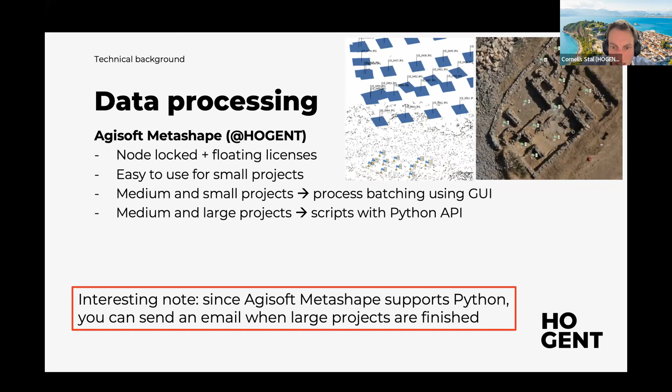So just a little side note that was very interesting.

In terms of data publication, old school data publication is really about preparing your orthophotos and digital elevation models as cartographic deliverables, with the conventional grid system, a scale bar, and stuff like that. It's old school, but still very handy and easy to share your data and deliverables.

Another way is to share the data as georeferenced images, as a TIFF, for example. When talking about 3D models, most often you'll see file formats like a PLY file, FBX file, or OBJ file, accompanied with one or multiple texture maps. You put it on your USB stick, put it on WeTransfer, and share your data as is.

The problem with these approaches, however, is that you will always need some kind of external viewer to interact with this data, which is not very convenient. Not everybody has ArcGIS or QGIS. Not everybody has a 3D viewer like MeshLab.

That's why we've decided to focus heavily on, for conventional 2D data, tiled 2D models. I'll explain that in the next slide about spatial lite databases, but also tiled 3D models that are compatible with online point cloud viewers on one hand, and online 3D viewers, so textured 3D model viewers that can be used in a browser. There's also an option to use online services like Sketchfab, or put all this data on your own hosting space.

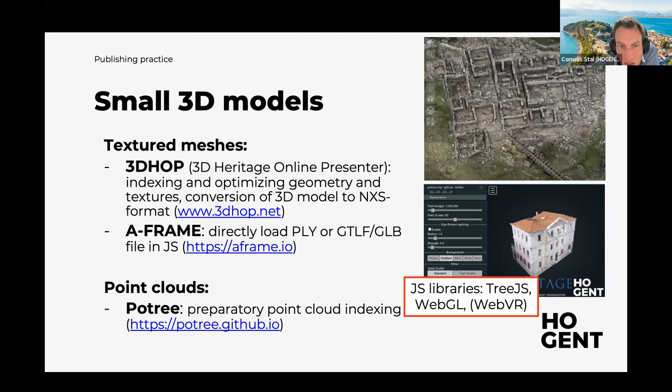So as a function of zooming in and zooming out, a certain amount of data will be loaded into your web browser. Here on the lower right-hand side, you see a small example of the town hall of Nafplio in the Peloponnese in Greece, where millions and millions of points are visualized, but only a portion of this is shown as a function of the distance to the object.

When it comes to large models, and large meaning gigabytes and gigabytes of data, there are other interesting options like Cesium. It's actually a virtual globe software like Google Earth, but totally open source. In this case, I'm also using the open source JavaScript library for data visualization. From Agisoft, we are using that software, which has the option to export your tiled 3D model in a format compatible with this JavaScript library, allowing very smooth interaction with these databases.

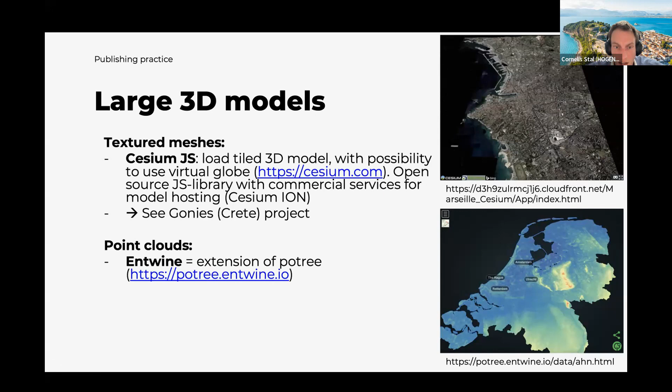With a few slides, I will give you an example of that, because these are examples that I found online. Here, the city of Marseille implemented in Cesium. And on the lower right-hand side, you see the Algemeen Hoogtemodel Nederland, a very dense point cloud derived from airborne laser scan data. In this case, it's published in Entwine, which is actually an extension of Potree to facilitate very big point clouds and point cloud publication.

So some short overview of our projects, with a special focus here on cultural heritage. Unfortunately, I only have half an hour, so I really have to limit myself to some basic information. But it's also a good opportunity to start at the real start, where we begin working.

That's where I start working with drones and airborne photogrammetry, or UAV-based photogrammetry, under UGent and Hogent affiliation. Initially, in Mexico, on the archaeological site of Edzná, it was the INAH Campeche, the Instituto Nacional de Antropología e Historia, that was requesting a 3D representation of some archaeological sites in the Yucatan Peninsula. With some colleagues, we went there with our do-it-yourself drones and made some very nice 3D models, also accessible through this website from the geography department of UGent.

A couple of years later, we also went to Honduras, to Rio Amarillo near Copan, where we did some initial experiments with near-infrared photogrammetry. We had two cameras, two identical bodies - one a normal camera, and the other one we removed the hot mirror, which made our sensor sensitive to near infrared. The entire area was flown twice in order to derive some indices for vegetation modeling, to work on crop mark detection, which was a very interesting project.

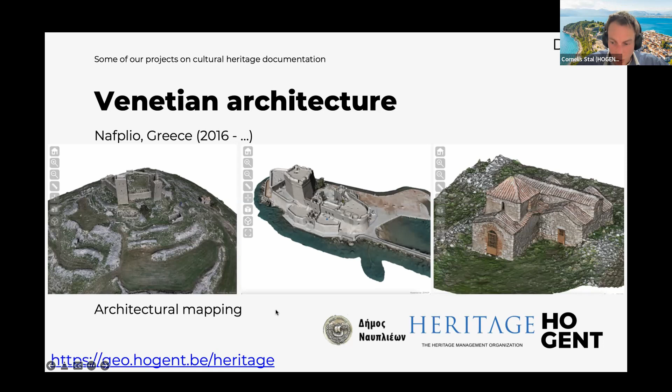Again, we are focusing here on interactive 3D visualization online. For your information, I also put the URL of our project on this slide.

One of the main reasons I was invited to give this talk was the project on the village of Gonies on Crete, a very small village, about 30 kilometers away from the capital, the city of Iraklio, but if you go by car you need an hour drive, so it's quite a remote village. Back in the 60s and 70s there was a very vivid population there.

But because of the decrease of farming activities, many people left the village - they went to Iraklio, to Athens, to the United States. And with these people, the very rich heritage, especially the intangible heritage, left the region.

If you go to this village, you'll see the average age of the people there is between 80 and 90 years. Unfortunately, there are a lot of black-dressed widows there.

In order to prevent the loss of the intangible heritage - the stories told from generation to generation by shepherds going from one side to another, the things that happened during the First and Second World War, and common stories - these are all being recorded. Our 3D aim in this project is to visualize these stories in terms of a 3D representation.

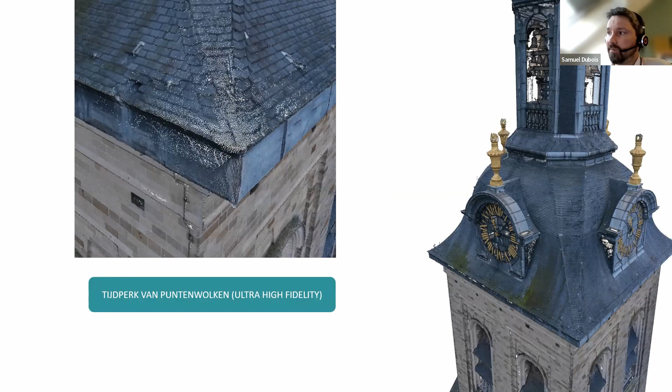On peut aller dans de la très haute fidélité, mais plus on veut du détail, plus on doit prendre de photos. Et on se rend compte qu'on peut se permettre de le faire manuellement, et on le fait encore souvent manuellement pour des missions de détail, mais c'est très fatigant. Donc on essaie de trouver des manières automatisées pour aller un peu plus loin.

Une petite remarque ici, j'ai mis cette vidéo pour confirmer qu'on travaille de plus en plus avec des petits drones. Ça, c'est un modèle réalisé avec le Mini 2. Désolé de faire toujours de la pub pour DJI, mais ça reste des bons petits drones. Malgré son poids limité et son capteur de 12 mégapixels, c'est un cas que j'avais déjà montré, mais on a vraiment cet aspect qualitatif si on prend beaucoup de photos.

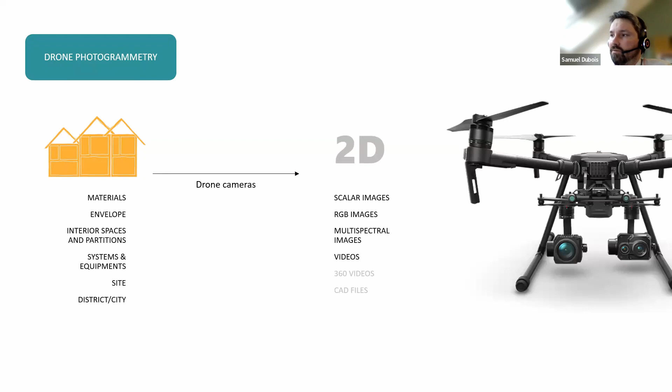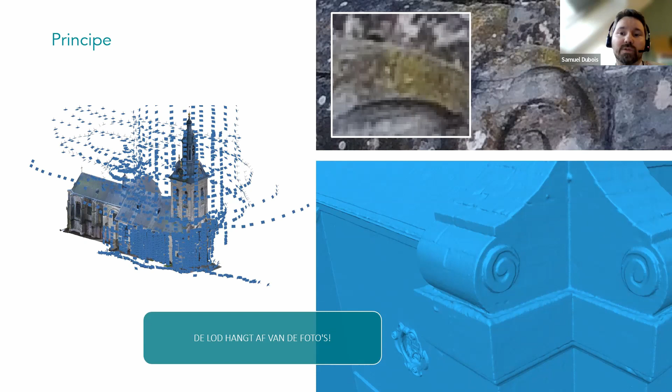En photogrammétrie, vous connaissez, on peut travailler à différentes échelles et créer des images. Le gros contexte ici, c'est vraiment ce lien entre le niveau de détail et la photo, avec toujours cette règle : la taille d'un pixel va nous permettre d'évaluer la précision, ou en tout cas le niveau de détail, avec une règle générale de multiplier par 2 la taille d'un pixel pour avoir une idée de la précision qu'on peut atteindre. Voilà, vous voyez toutes ces photos prises manuellement, plusieurs batteries, c'est fatigant. On est dans la quête de nouveaux outils pour aller un peu plus dans l'efficacité.

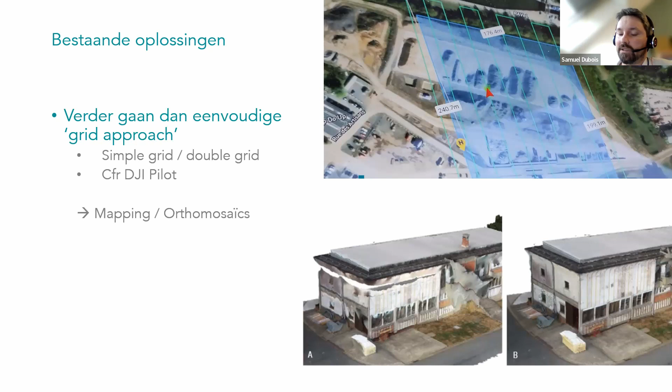L'automatisation du vol, c'est quelque chose d'assez logique qui existe depuis des années. Tout le monde a commencé par ces vols automatiques en grid, avec des grilles simples, des grilles doubles, ce qu'on trouve dans Pix 4D ou DJI Pilot. On a toujours cette limite : si on travaille exclusivement en nadir, il y a une limite de qualité. Si on prend que des images parfaitement verticales, on n'aura pas un niveau de détail suffisant pour faire de la vraie 3D. Ça peut être suffisant pour des orthomosaïques, pour des plans, mais peut-être pas pour de la vraie 3D.

Et donc on a petit à petit fait évoluer les outils, enfin on a découvert des outils. Il y a des nouvelles choses assez chouettes qui sont arrivées, comme ici Drone Harmony, qui est un des outils un peu plus avancés qu'on peut trouver sur le marché, mais qui reste relativement coûteux. Il faut que ça puisse être amorti, évidemment.

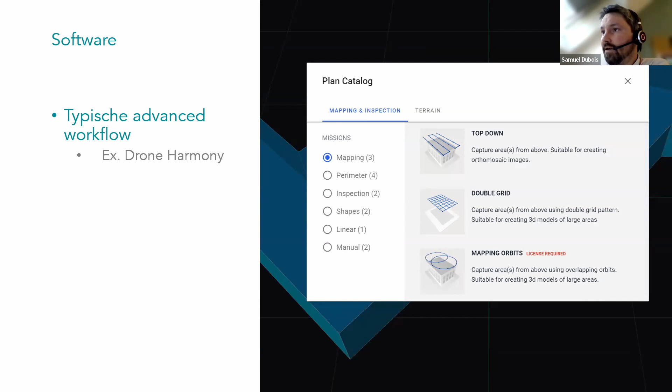On commence toujours par un procédé assez simple : on dessine un polygone au niveau du bâtiment d'intérêt, on peut déterminer sa hauteur pour avoir un volume 3D. Le logiciel va ensuite nous proposer différents types de missions types, des missions de type mapping, avec des vols en grid, des vols en double grid ou éventuellement des orbites. On va pouvoir choisir le type de mission et avoir une visualisation prédéfinie de ce qui va se passer.

Ce que j'aime bien dans cet outil, c'est vraiment l'aspect dynamique. On peut venir, vous allez le voir, changer la hauteur de vol, voir l'effet que ça a sur le nombre de photos, changer l'overlap, quelque chose d'assez courant.

Ce sont des outils qui fonctionnent bien, mais on reste encore sur des formes, à ma connaissance, relativement simples, donc des volumes. Je pense qu'ils ont un module pour les terrains où on peut aller un peu plus loin, on peut importer une forme 3D de terrain, mais ça reste encore relativement simple dans l'approche.

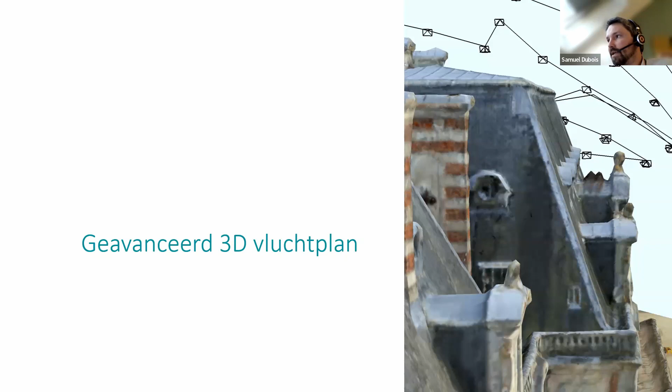Là, on voit des missions que j'aime bien dans ce genre d'outils, de pouvoir aller sur vraiment des missions de façade, des inspections horizontales, c'est assez intéressant. Mais le cœur ici de cette petite présentation, je vais essayer de ne pas être trop long, ce sont des modes de vol, donc de pré-programmer des vols de manière un peu plus avancée et de lier directement à la photogrammétrie, et dans notre cas, à de la photogrammétrie de détail, donc assez poussée.

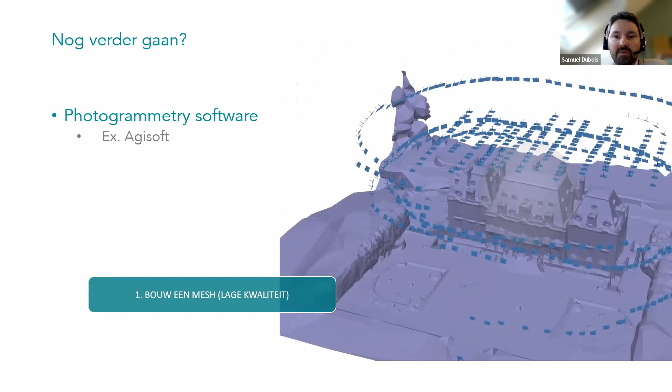Et ça tombe bien, je vais aussi parler d'Agisoft, un outil qu'on a beaucoup utilisé, qui fonctionne bien, qu'on trouve assez équilibré. Ce qu'on a découvert dans ce logiciel, c'est qu'il y a une fonctionnalité assez cachée qui permet de planifier vraiment le vol sur base d'un modèle existant. On va partir d'un modèle qu'on a : on peut soit le récupérer d'une autre source, du moment qu'il est géoréférencé, ou alors le créer avec peu de photos.

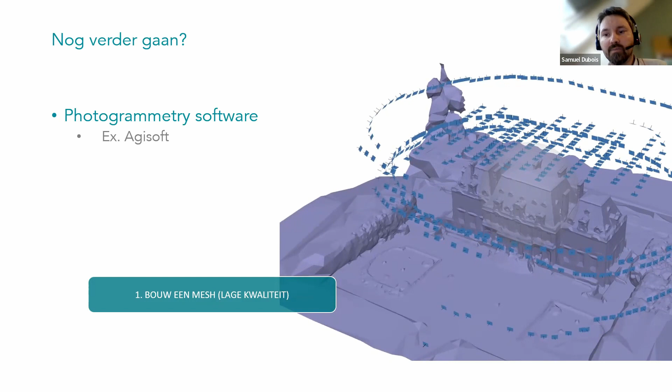Ici, on a déjà pas mal de photos, mais on pourrait vraiment faire simplement un périmètre, prendre une cinquantaine de photos, générer un modèle. Et sur base de ce modèle, le logiciel va nous proposer la meilleure manière possible de prendre les photos pour avoir un niveau de détail qu'on va déterminer.

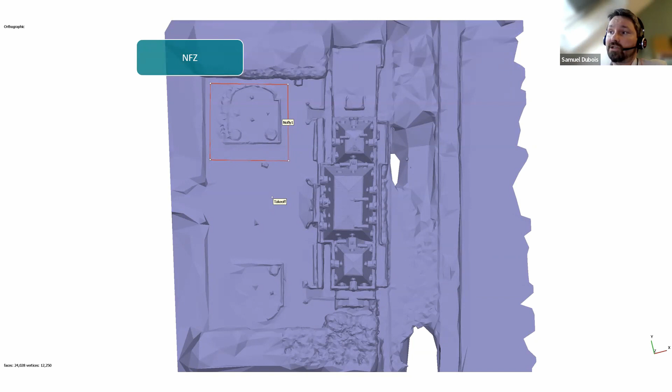Donc, comment ça se passe? Désolé pour ceux qui connaissent déjà, mais nous, on trouvait ça vraiment intéressant et vous allez peut-être voir des perspectives de recherche. Donc, on va déterminer un point de décollage. Vous voyez le point take-off ici sur le maillage.

Il faut évidemment que ce soit géoréférencé pour que ça ait un petit peu de logique dans le vol. On peut définir des no-fly zones, donc une zone qu'on ne veut pas survoler absolument. On peut faire des polygones, dire ici, on ne peut pas survoler cette zone-là pour une raison ou une autre.

Et ensuite, éventuellement, si on a envie, on va définir vraiment une zone d'intérêt. Donc dire ça, c'est la région dont je veux faire la reconstruction. Dans ce cas-ci, un château bien texturé qui se prête bien à la photogrammétrie.

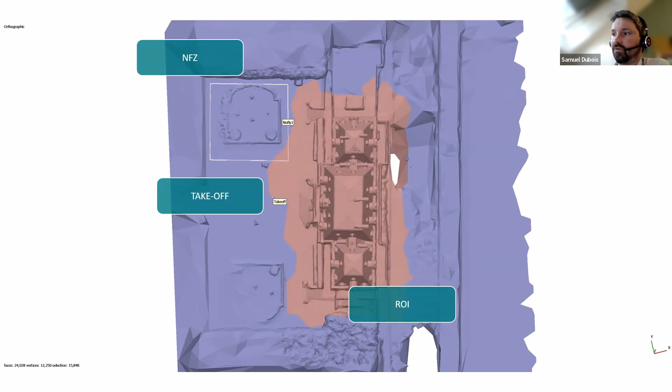Et on va pouvoir entrer toute une série de paramètres qui sont bien connus, je pense, de la plupart d'entre nous. Donc on a le plus important, la résolution. Combien de centimètres par pixel je veux obtenir. Quel est l'overlap que je veux obtenir, donc toujours les mêmes paramètres.

Est-ce qu'on veut se focaliser sur une zone d'intérêt? Est-ce qu'on doit garder une distance de sécurité par rapport à l'objet? Ça, c'est évidemment très important dans la préparation, c'est de bien anticiper les objets qui sont éventuellement pas reconstruits ici, mais s'il y a des arbres, des obstacles mouvants, il faut bien sûr les prendre en compte. Déterminer une altitude minimum en dessous de laquelle le drone ne peut pas aller, des zones de sécurité, etc.

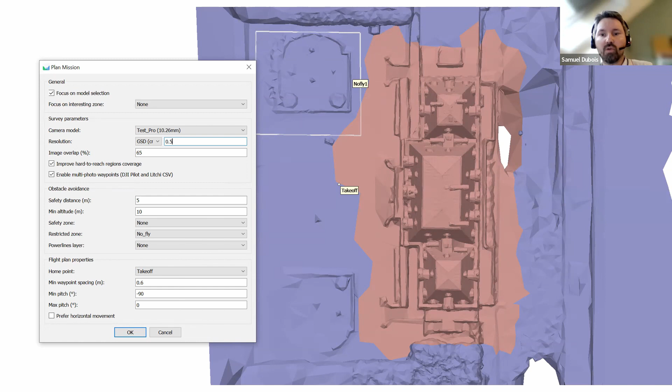Vous voyez l'idée. Il y a même moyen de régler, ça c'est assez intéressant, le pitch minimum. Si vous ne le savez pas, sur le Mini 2, par exemple, on peut augmenter un petit peu l'angle de caméra vers le haut. Donc ça, c'est aussi quelque chose qu'on peut prendre en compte si on a cette capacité de viser un petit peu vers le haut, on peut l'encoder.

Et donc, on a une proposition de vol qui est relativement chaotique au premier abord, mais qui en fait est vraiment considérée par le logiciel comme la manière d'assurer une homogénéité complète au niveau du modèle et d'avoir la meilleure prise de vue possible en prenant en compte la no-fly zone.

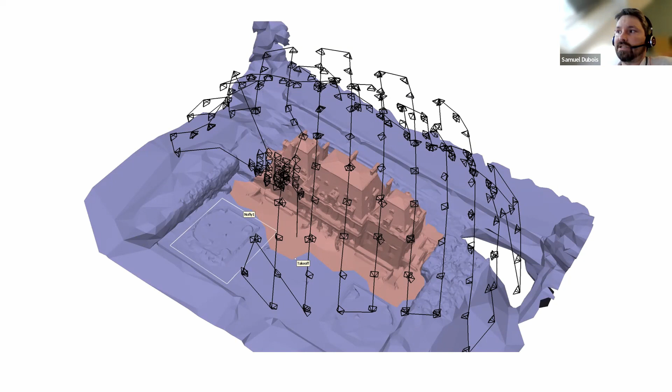Donc il s'est rapproché très fort de la façade. Si, en se rapprochant de la façade, il rentre dans une zone de risque, donc dans la limite de distance, et bien alors il n'y aura malheureusement pas de photo à cet endroit-là où il va faire le mieux possible. Mais donc, c'est relativement intelligent comme approche. C'est accessible là dans Agisoft, mais c'est quelque chose qu'on pourrait reproduire de manière externe.

Et alors, on peut changer, on peut trouver un petit peu le meilleur compromis entre le nombre de photos. C'est ça qui devient assez chouette, c'est de vraiment aller modifier les paramètres pour, par exemple, limiter à 200 photos si on veut avoir 100 photos par batterie, par exemple, ou que sais-je. Là, on voit que si on passe à une résolution supérieure, on a quelque chose qui est peut-être plus homogène dans la prise de vue.

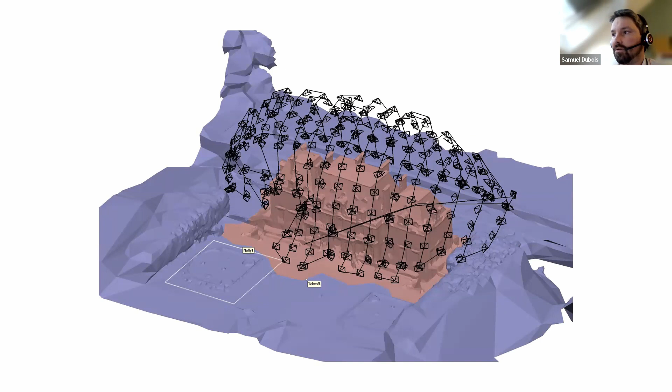Donc ici, qu'est-ce qui se passe une fois qu'on a ce plan de vol? On va pouvoir exporter ça dans un format de vol, donc comme un KML. Nous, on utilise dans ce cas-ci DJI Pilot sur le Mavic 2. C'est ce qu'on fait la plupart du temps. Mais on pourrait, je pense, utiliser ça dans Litchi ou dans d'autres outils de vol préprogrammés.

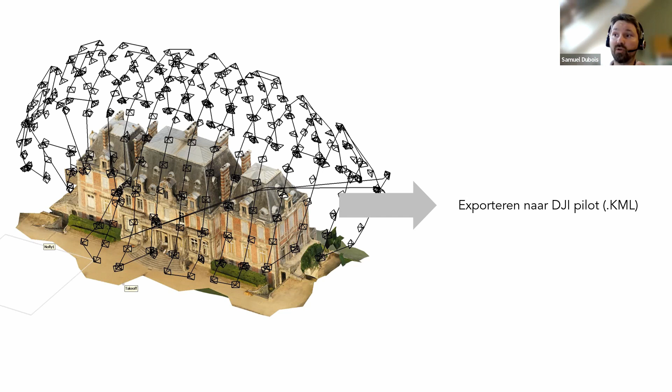Et alors, il faut vraiment voir, ça c'est une subtilité, c'est que la caméra aussi est orientée. Et ça, c'est quelque chose qu'on ne trouve pas toujours dans les programmations de vol. C'est qu'on peut, à chaque point d'arrêt, donc à chaque point de passage, avoir un angle de caméra différent. Et donc, c'est assez impressionnant de voir quand on lance ce vol, de voir le drone qui change en permanence son angle de vue et son vol.

Là, on va dire pour le fun, on peut faire réaliser cette mission par le logiciel et on voit qu'il réalise toute une série de photos. Il y a un peu moins de cohérence que dans certains vols préprogrammés et donc ça, il faut aussi le prendre en compte par rapport au logiciel.

Des logiciels comme Reality Capture n'aiment pas trop qu'il y ait un suivi moins clair entre les photos, donc ça marche très bien pour Agisoft, mais il faut être conscient que ça peut moins bien marcher pour d'autres logiciels.

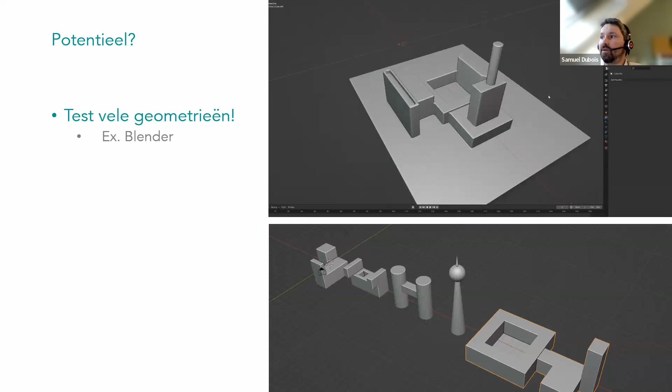Et donc, qu'est-ce qu'on peut faire ? Évidemment, si on veut plutôt aller dans la recherche, mieux comprendre comment prendre les photos. Mais on s'est dit qu'on peut aussi aller créer des formes de bâtiments, toutes les formes complètement biscornues qu'on pourrait trouver dans des missions.

On peut dessiner ça, par exemple, dans Blender, qui est un outil open source de dessin 3D, et venir voir un peu comment le logiciel de photogrammétrie nous conseille de prendre les photos. C'est, je pense, un outil assez intéressant pour la recherche, mais aussi pour améliorer sa manière de prendre les photos, et peut-être aussi prendre un peu moins de photos que ce qu'on a parfois tendance à faire.

Donc là, ce qui se passe une fois qu'on a créé ce modèle 3D, on l'importe dans Agisoft comme un maillage, et le logiciel va pouvoir nous proposer quelque chose.

Ici, on est vraiment, imaginons, une grande industrie, la manière de voler. Vous voyez qu'il nous montre aussi comment descendre au niveau de la cour centrale, si on imagine que le petit vide là est une cour centrale. Et donc, on a en tout cas un aperçu de la manière, pour le logiciel, de prendre les meilleures photos.

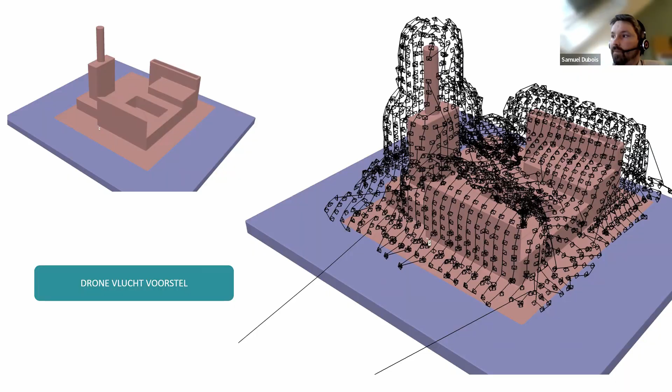Un autre exemple par rapport au balcon : on voit, imaginons un grand bâtiment, c'est complètement théorique, mais on voit vraiment la prise en compte des zones non visibles et comment le logiciel va nous proposer d'aller photographier ces zones non visibles.

Ici, on voit s'il y a, je ne sais pas comment appeler ça, imaginons une rambarde sur cet énorme bâtiment, alors il va modifier complètement sa manière de voler.

Donc c'est vraiment pour la photogrammétrie de détail, pour ceux qui font vraiment du très qualitatif, ou pour des projets où il y a besoin vraiment d'aller chercher chaque petit détail. C'est un outil qui est assez intéressant et qu'on découvre au fur et à mesure.

Et je pense que, comme souvent, on voit qu'il y a des ponts entre les logiciels, et c'est quand on commence à sauter d'un logiciel à l'autre qu'on peut commencer vraiment à faire des choses nouvelles, et peut-être se distancer d'autres prestataires sur le marché.

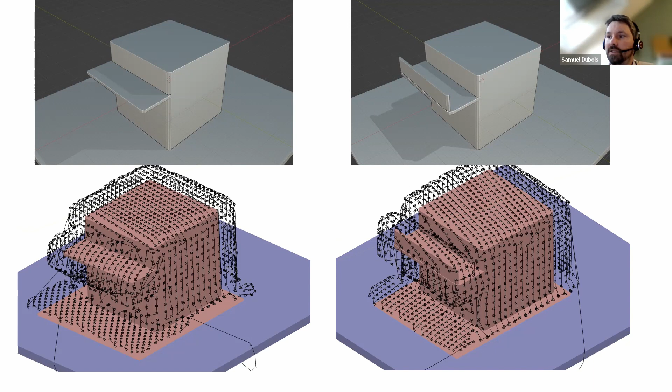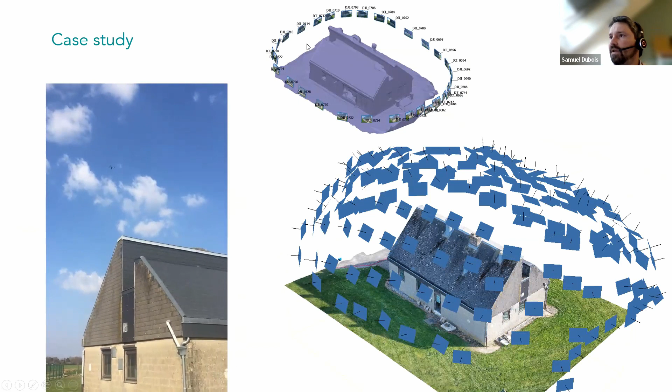Alors pour terminer, parce qu'ici ce n'était pas le but de faire une très longue présentation, on voit ici le vol en question sur un tout petit bâtiment, et vous retrouvez cette idée qu'on peut faire un premier vol juste en périmètre, donc on prend, vous voyez, une trentaine de photos, on crée un modèle préliminaire.

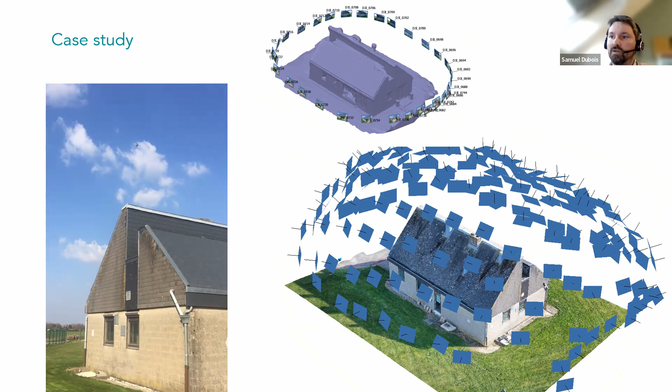On peut même faire ça sur chantier, c'est ce qu'on fait de plus en plus, et ensuite on fait un deuxième vol avec la proposition du logiciel, et on a dans ce cas-là vraiment un overlap qui est optimal. Et donc on rend quelque chose d'assez nouveau dans ce vol en deux étapes, qui permet vraiment, sur certains objets, d'améliorer fortement la qualité.

Là, on voit une estimation, dans Agisoft, de la qualité, de la confiance dans le modèle. Et on voit que si on vole de la manière qu'il nous conseille, on optimalise vraiment. Il y a très peu de zones mortes, de zones non visibles sur le modèle. Donc voilà, c'est un petit aperçu.

J'espère que certains ne connaissaient pas ce genre de fonctionnalité. L'avantage, c'est que ça ne représente pas un coût supplémentaire pour ceux qui sont déjà sur ce logiciel-là. J'imagine que ça va se développer dans le futur dans d'autres logiciels, mais c'est enfin une réponse, je trouve, qui est cohérente par rapport à ce besoin de sortir du nadir.

On ne veut pas tout le temps faire du nadir. Parfois, il y a besoin de faire des choses un petit peu plus complexes. Et là, on est sur un outil intégré.

Je parlais de Drone Harmony, qui est aussi très impressionnant, mais qui est à nouveau sur un système d'abonnement, donc ça représente un certain coût, il faut payer chaque année, etc. Donc là, pour Agisoft, c'est relativement bien.

If we buy survey equipment, quality is expressed in accuracy. If we buy a tool that is advertised as 1 millimeter accurate, it means that 68% of observations will fall within 1 millimeter of the true value and 95% within 2 millimeters. We do not need to worry about the precision separately, because the term accuracy encompasses both the trueness, being on target, and the precision, the spread of the observations.

You don't have to take my word for it, it's a well-established norm. Also, the resolution is certainly linked to precision, but by no means is your ground sample distance the same as your accuracy.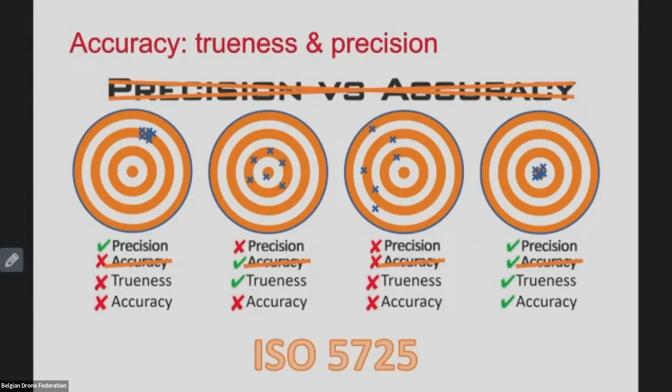This is a test site, but first some background information. Software will calculate for you the standard deviation of your solution based on the geometry of your observations and the entered presumed quality of your observations. Those are quality features that you tell your software to assume.

In a classic photogrammetric block, these observations are, for example, the quality of your ground control points and how well you can mark these points in an image, like half a pixel. Next to that, the software will usually give you an error or chi-square test number, based on the residues on your observations, weighed against your entered standard deviation. The residues are the difference between the assumed calculated value and the measured value of the observation.

This error number can be enhanced by removing outliers. Removing a bad observation just because it has a large residue is, however, not okay. You're just fooling yourself.

Lens correction is also often calculated on the dataset itself so as to fit the data best, minimizing the residues again. This introduces some extra optimism. It's a bit like first calibrating your ruler to an object and then measuring that same object with that same ruler.

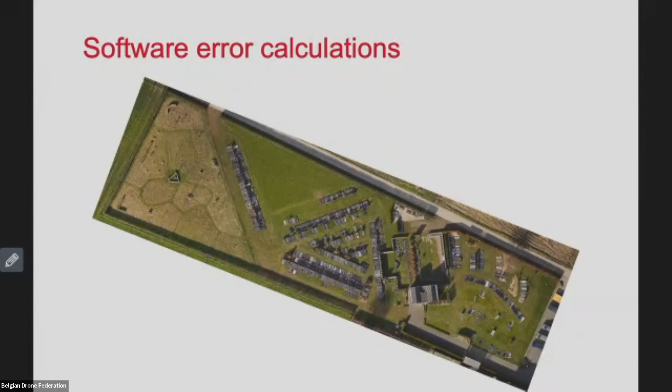You can test this yourself. If you have a photogrammetric block, just simply do not use one of your ground control points and then measure the results in your software. Here we did this for you.

On the left, we use the ground control point, and of course, the marker fits the ground control point. On the right, we did not use it, and it's off by 3 centimeters. That's not much, but it's a lot more than what the software predicted.

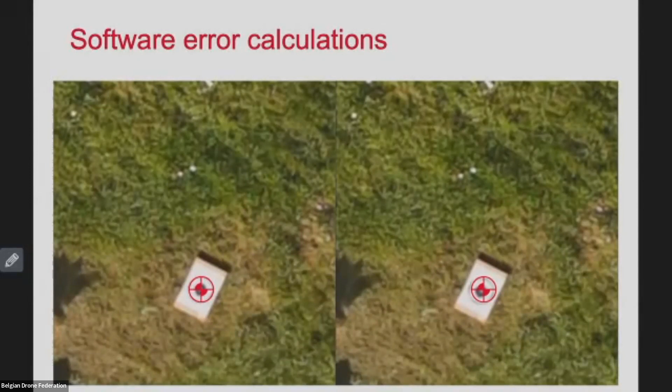If you use a scale bar, a 1 meter scale bar is okay for a 1 to 3 meter object, not for a 100 meter building, of course.

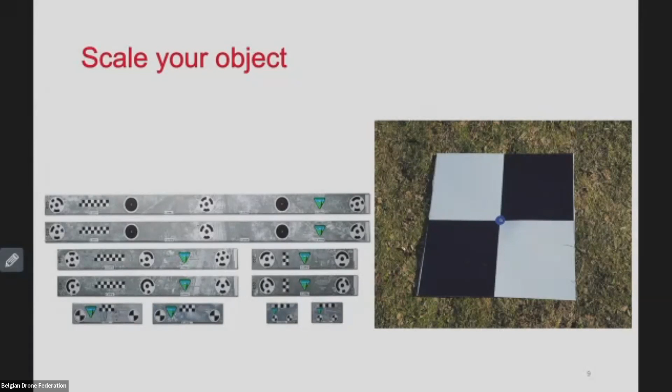Placing ground control points might be time-consuming and even expensive, but they are imperative to control your results. Most important are ground control points at the start and the end of the flight line. Spread them out evenly around your area of interest.

You need at least and only 3 to georeference your results, but images are stitched together in a daisy chain, one pair after another. Each stitching result has an uncertainty, and this uncertainty is accumulated over all stitches, resulting in a drifting effect. This effect increases exponentially with the distance to the ground control points. So in a large block, it's useful to have ground control points in the center of your block as well.

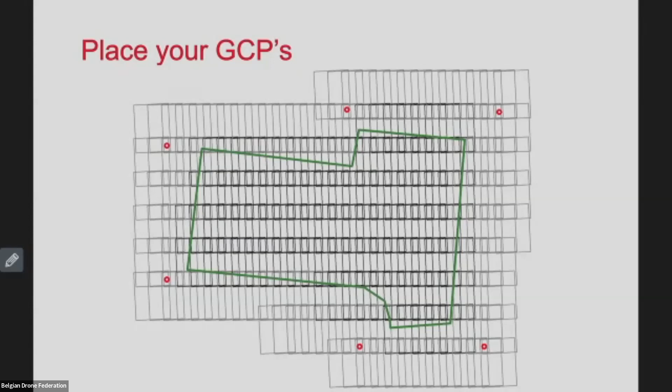And I know with your drone, you will fly with a lot more overlap than this. So it'll probably look more like this. There is a limit. When your standard deviation is in the same order of magnitude as your ground sample distance or the standard deviation of your ground control points, then it's no longer beneficial to add more.

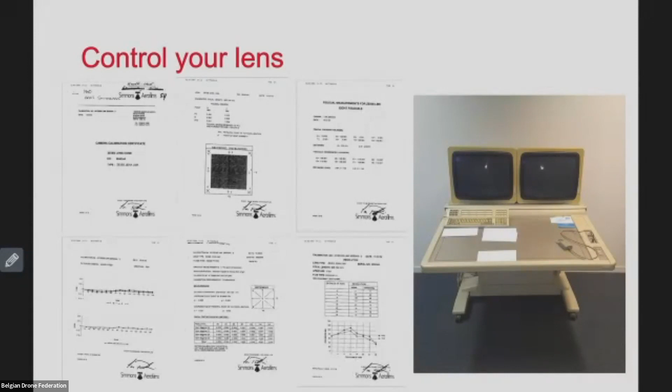If you use your software to calibrate lens parameters, make sure to provide the images needed to calculate all possible effects. An example is the effect you can get by providing only images with the same distance to the object. And we do this all the time.

This is a bit of a simple explanation on focal length, but the same applies to other lens parameters as well, the radial distortion for example. Your software is able to estimate these parameters, but it needs a data set appropriate for this task, meaning a flight at different altitudes and a mix of oblique and nadir images.

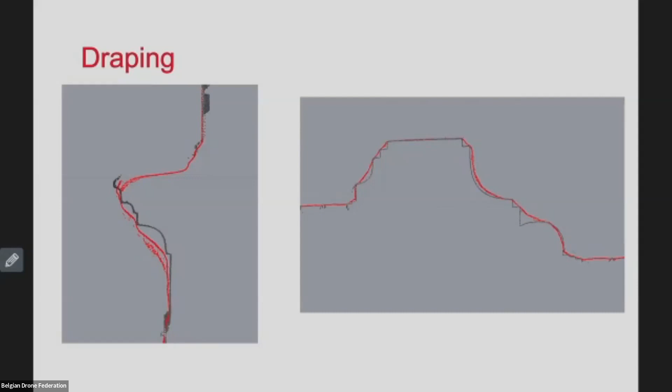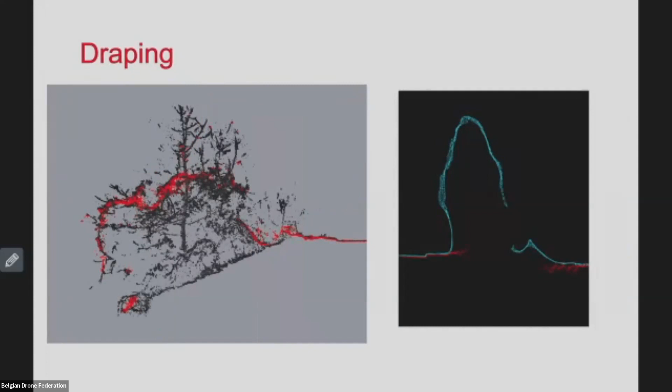Vegetation is another type of object that's hard to capture with photogrammetry. The photogrammetric point cloud will look like someone has draped a sheet of paper over the vegetation. For those types of objects, other sensors might be better suited, like laser scanners.

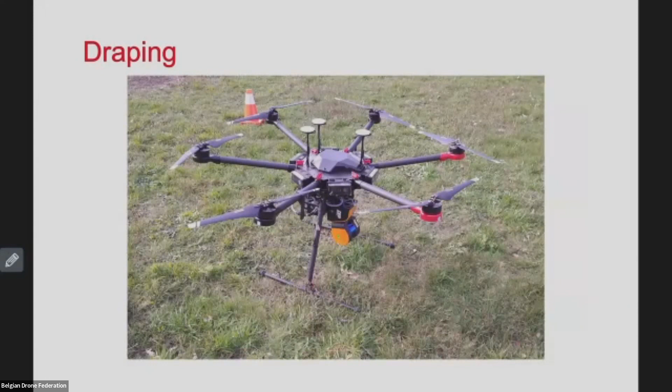I promised some cases. We have put photogrammetry, and more specifically drone photogrammetry, to use in a variety of cases, sometimes replacing old workflows, sometimes producing new deliverables.

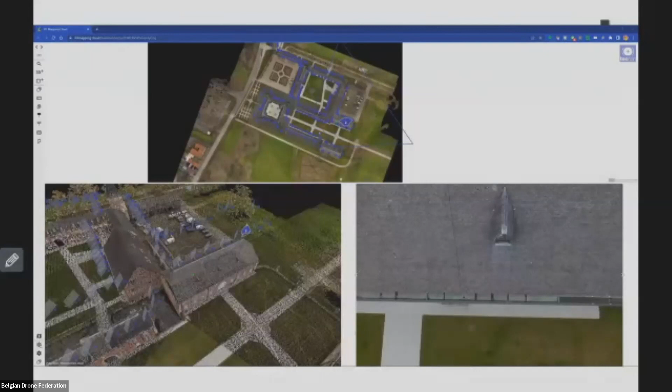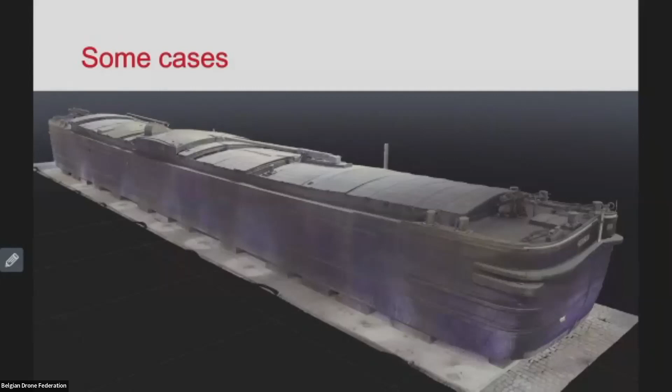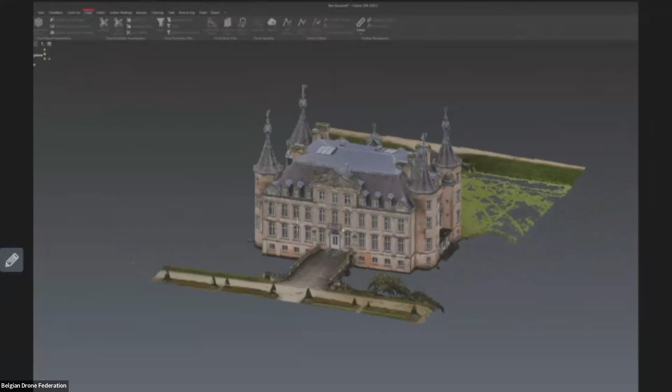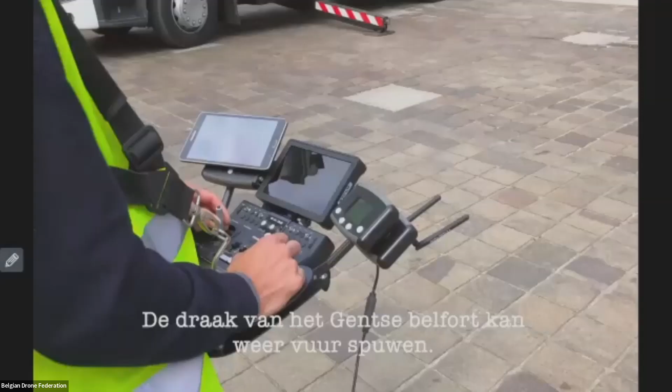And that's also the last example of my presentation.

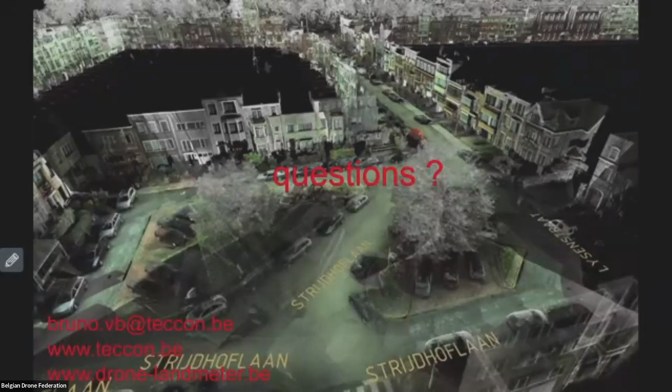Please remember, software tends to unburden you from menial tasks, but it also has the tendency to hide the flaws. Know what your software can do for you and what you still have to control yourself. Get educated on the subject and make sure you don't make any costly mistakes.